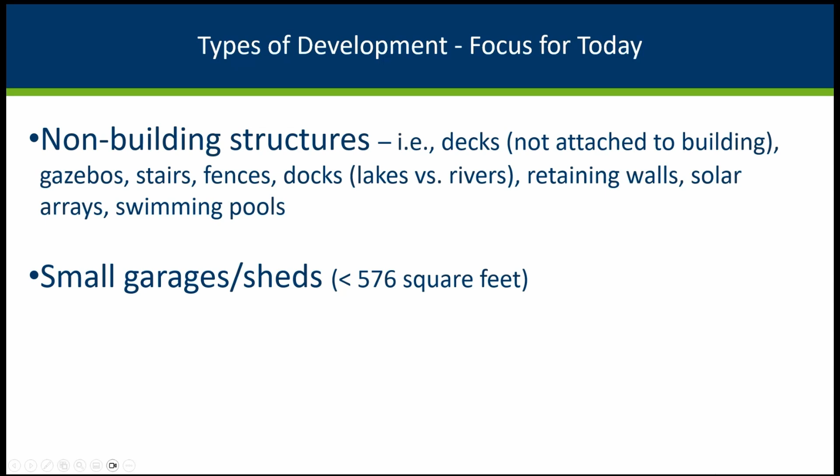The non-building structures category covers a lot of different things, including decks that are not part of a building, gazebos, stairs, fences, docks. We didn't have a separate slide about docks, so I'll mention that, especially on rivers, if you're having permanent docks, you've got to look at whether it's causing a rise in flood elevations—that's one of the concerns with floodways. Retaining walls, solar arrays, swimming pools—there are all kinds of things that get built that aren't actually buildings, but are structures in the floodplain that need to be considered and regulated.

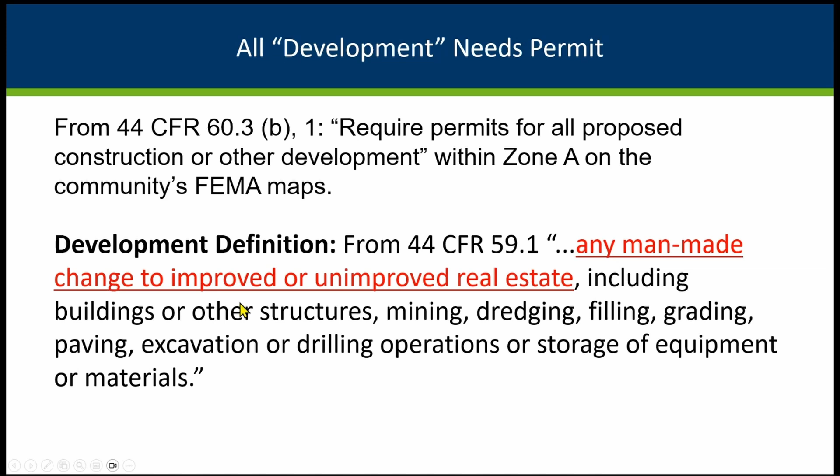Right off the bat, some of this will be repeat if you've heard our other basic presentations recently. One of the big things we always remind folks is 44 CFR 60.3b, from the Code of Federal Regulations. It states that all development needs a permit if it's within Zone A or AE, within the special flood hazard area on your community's floodplain maps. The definition of development is very broad—it certainly includes buildings, but also other types of structures, mining, dredging, filling, grading, storage of equipment or materials. It's any man-made change to improved or unimproved real estate.

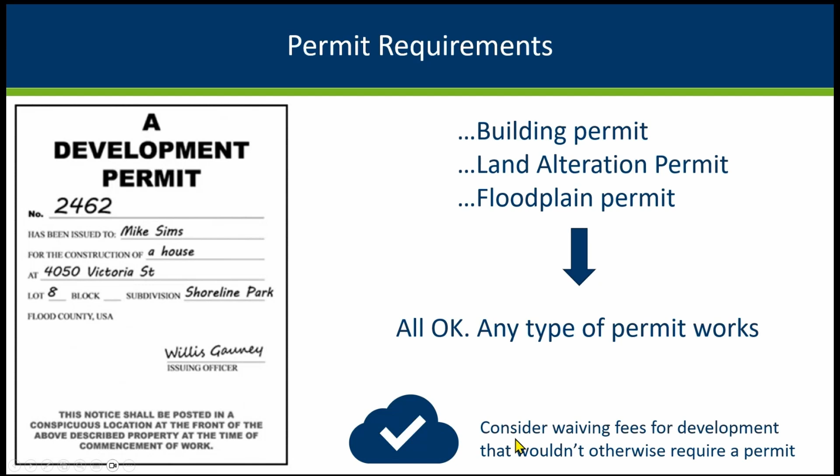That permit doesn't have to be a certain type. If you have building code and it's a building, you'll issue a building permit. But communities might call it a land alteration permit, a zoning permit, or a floodplain permit—any of those is fine. You just need some kind of permit process. And if it's something you wouldn't normally require a permit for, you can consider waiving fees or having reduced fees for those items.

I mentioned buildings, and we're specifically talking about smaller sheds today. Those of you with building code are used to saying, if it's a small shed under 200 square feet or whatever size the building code exempts, that exemption does not exist for floodplain regulations. Even small buildings that wouldn't require a building permit under the building code need a permit here, and a lot of other non-building structures we'll discuss also need a permit.

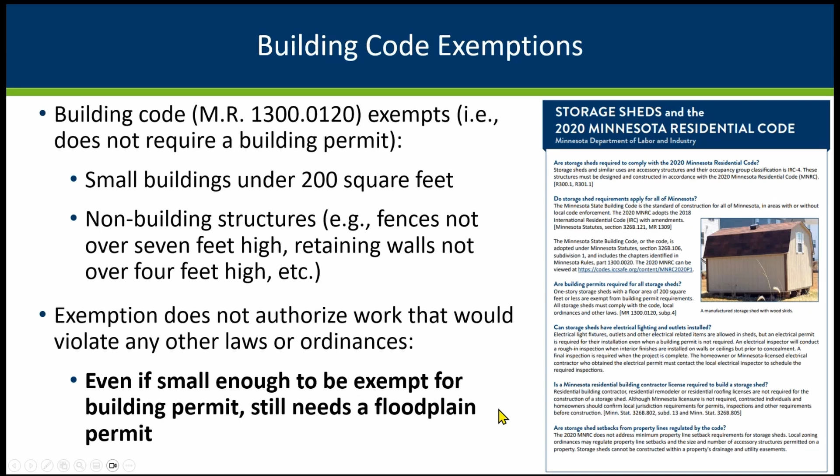So basically, it needs a permit if it's in the mapped floodplain. Part of our typical process is determining whether it's in the mapped floodplain and what district it's in, because that makes a big difference in terms of whether that building or structure is permittable and allowed in the floodplain, and what the requirements will be. So we'll be talking about zones.

I wanted to mention the different types of floodplain zones up front. The Zone A's are basically the 100-year flood zones. AE means it has an elevation on the official FEMA map—on older maps it had numbers instead of the E. Then there are a couple other categories: AO zones, which are more of an overland flow, and AH zones, which are more like ponded areas where the AH will have an elevation on the FEMA map, while AO will just have depths. We aren't going to get into details on these zones, but just be aware there are different A-type zones.

And then there's some A zones with nothing behind it, and that's where there might be some underlying supporting modeling or approximations of what the flood elevations are, but the base flood elevations are not on the FEMA map. We now will be having velocity zones or coastal zones in St. Louis as of March, in another couple months.

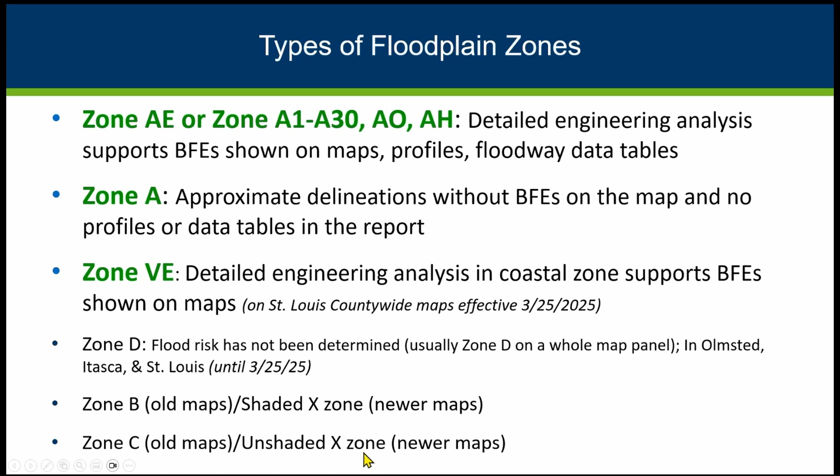Zone D is a place where the risk has not been determined, so it'll have a yellowish color on the FEMA maps, and we've just got a handful of counties where we have Zone D. Basically it's showing that the risk hasn't been determined, but there's no regulations for those areas. And the areas where we don't regulate, at least for the minimum standards, are shaded Zone X and unshaded Zone X, or Zone B and C on the older maps.

So the main zones that we're talking about are the floodway and flood fringe, which is how we break out the detailed study areas. And then we've got an area in your ordinance that we call the general floodplain, and that's going to be those approximate Zone A's and the detailed Zone A's where they haven't mapped the floodway, and we'll be talking about the floodway.

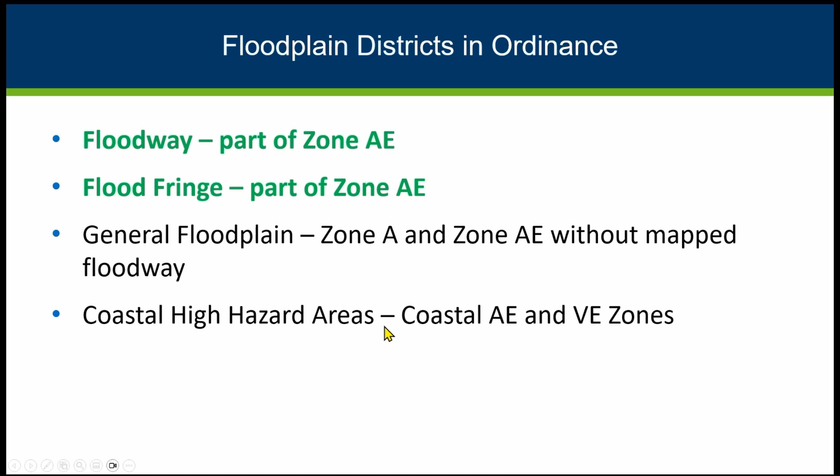We are not going to talk today about coastal high hazard areas. That's just in St. Louis County, so we'll just talk with the staffs there when those questions come up.

See if I can interrupt you real briefly. There was a question in the chat related to your previous slide, and they asked, when you say within the mapped floodplain, does that include Zone X in the shoreland zone?

Interesting question. Yeah, the floodplain regs don't. The shoreland goes beyond the floodplain in the shoreland zone, and there's some requirements that apply. The minimum elevations for buildings apply in the shoreland, but some of the other details we'll be talking about here are specifically floodplain regs. And if we want to get into examples toward the end, we could talk about what things might be different outside of the floodplain but within the shoreland district.

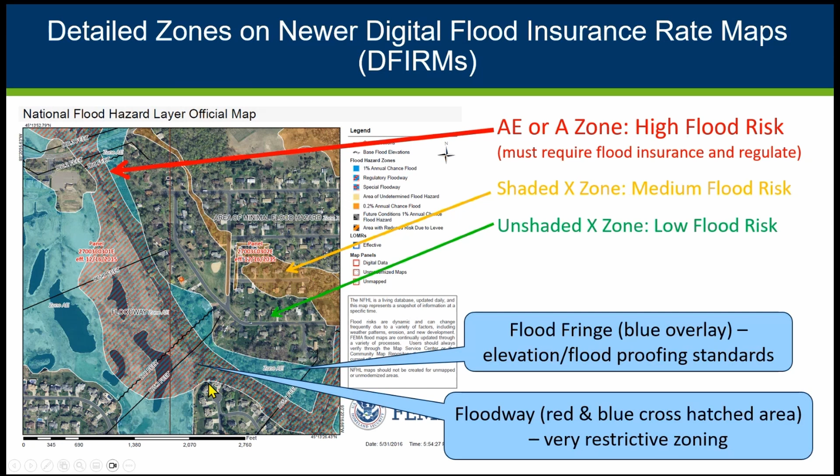On the newer maps, the coloring's a little different. The 100-year floodplain, the Zone A, is the light blue, with the floodway being this crosshatch, the hatched area with the red and blue. Again, the floodway is this area, and the flood fringe is that light blue area outside the floodway. The shaded Zone X is that medium risk area again, and the unshaded areas are the lower risk areas. So we're going to be again focusing on the floodway on both the old and new maps and the flood fringe.

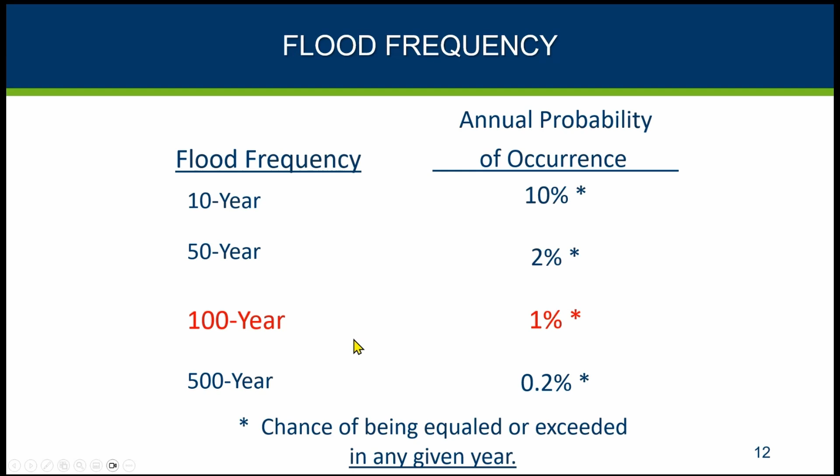And I've already used a couple of these terms, but the frequency that we use for regulatory purposes is the 100-year or the 1% annual chance flood. In the detailed areas they calculate other flood frequencies, but for the minimum requirements, we're talking about the 100-year or the 1% annual chance.

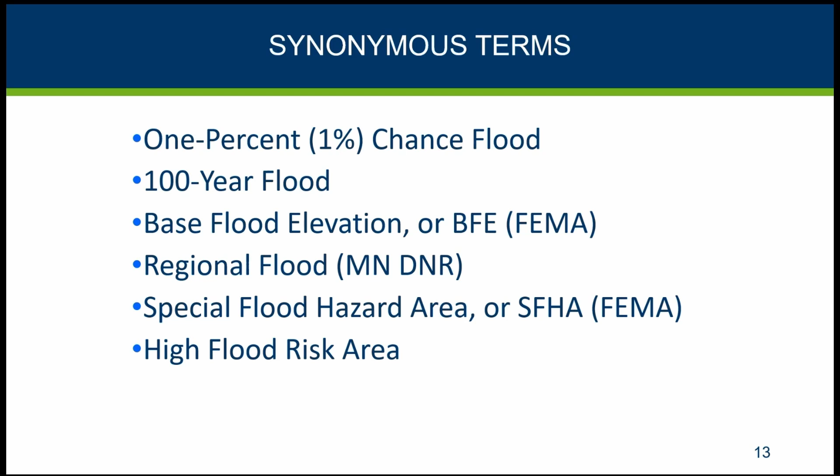And we do have different terms. I've already used a few of these: the 1% annual chance, the 100-year. Base flood elevation, or BFE, is a term FEMA uses a lot, and we'll talk about that with the mapping. Regional flood is what we call that in some of the Minnesota laws. Special flood hazard area is what we call the area when we're talking about lending requirements and insurance. And in general, we'll call it the high flood risk area.

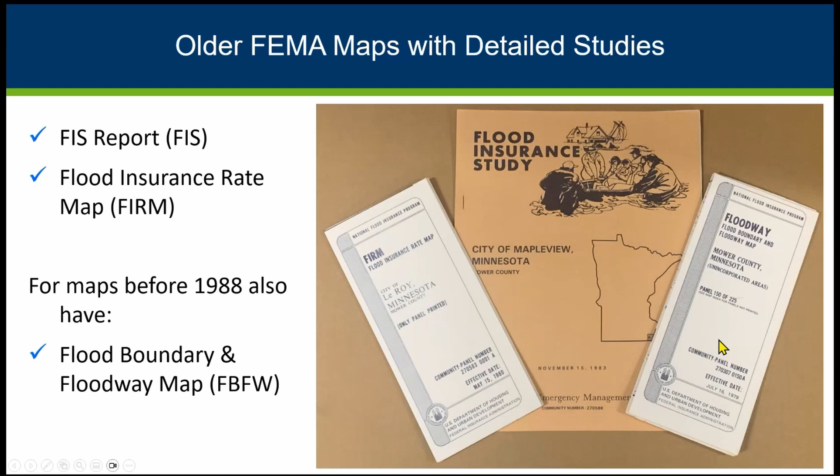So the first detailed maps that came out had a flood insurance study and they had a separate flood insurance rate map and floodway map. These generally came out before '88. And more recent maps are combined—they put everything onto one map.

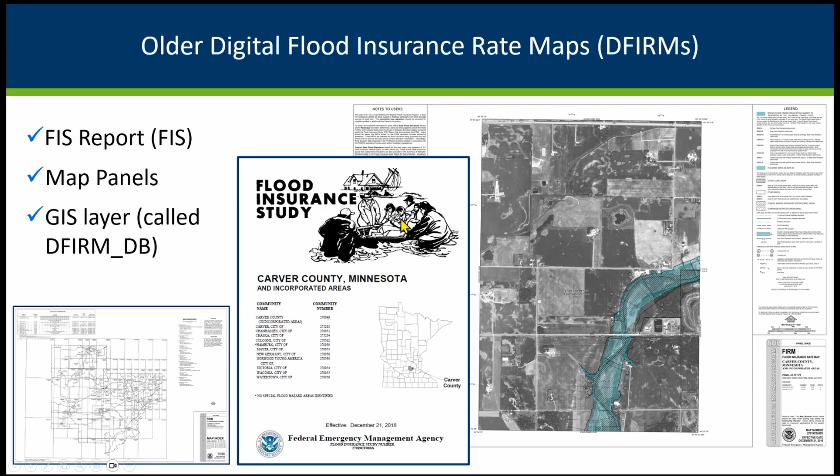Those older flood insurance studies tend to have this older look, with people being rescued looking like they're wearing 1950s clothes. But when the first digital maps came out, before the 2010s and the 2000s, we had some of the counties start the map update process, becoming digital.

Many of those counties, FEMA really just did a digital capture. You can see in this example on the paper map this weird shape for the floodplain, and that's exactly what they put into the digital version of those maps. So when you compare it to the 2-foot elevation contours, you'll see that some of those early digital maps' boundaries don't follow the contours very well.

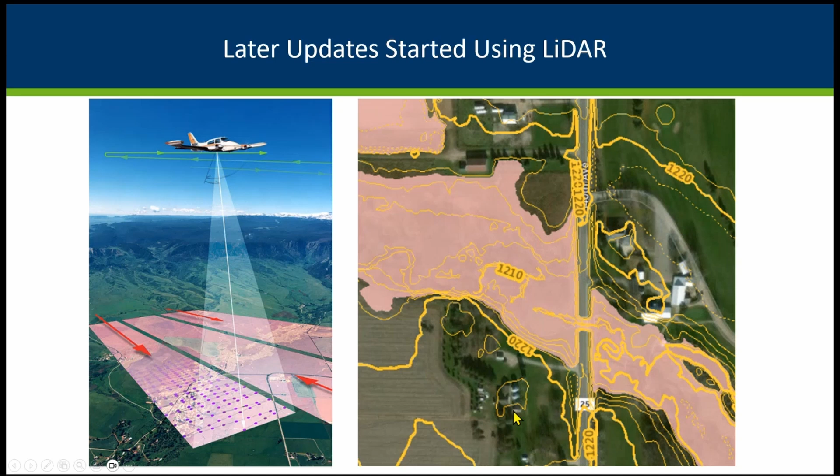But as time went on, and for those of you who got maps more recently, they used LiDAR, where planes fly over and shoot down light. They know the speed of light, so they can calculate really detailed ground elevations. The more recent maps' boundaries follow the elevation contours much better because they used that LiDAR to do the mapping and draw the boundaries.

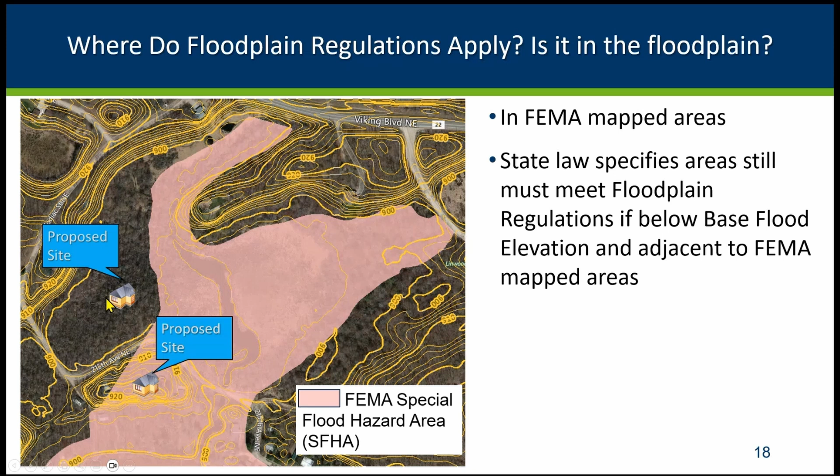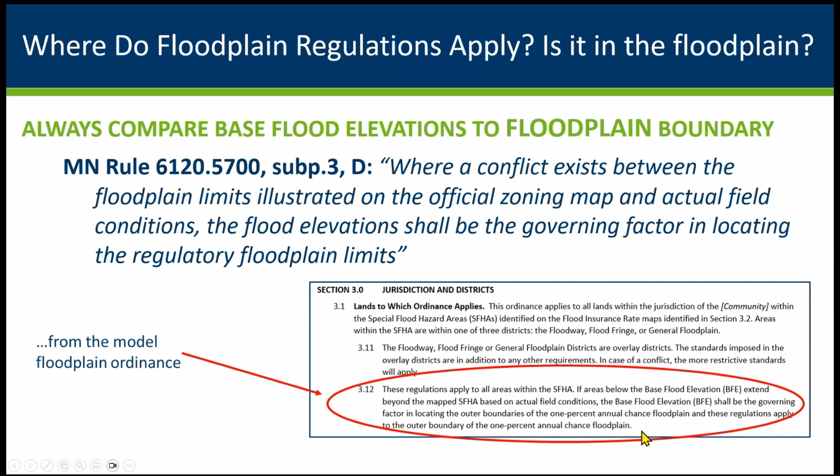A reminder that in Minnesota, state law requires your ordinance to regulate whatever's on the FEMA map — that's the FEMA minimum requirement. But state law also says that if you're in an area adjacent to that mapped area and below the base flood elevation, that is regulated by your ordinance too. So someone up high is still regulated because FEMA says you regulate whatever's on the maps, although they can get what's called a letter of map amendment, which we cover in other presentations. Someone who's low won't be told they need flood insurance right now — they will when the maps are updated and more accurately reflect the floodplain — but you're still regulating them because of our state law. We do have that wording in our model ordinance, basically saying that if they're in areas adjacent to the mapped floodplain and below the base flood elevation, you're regulating them.

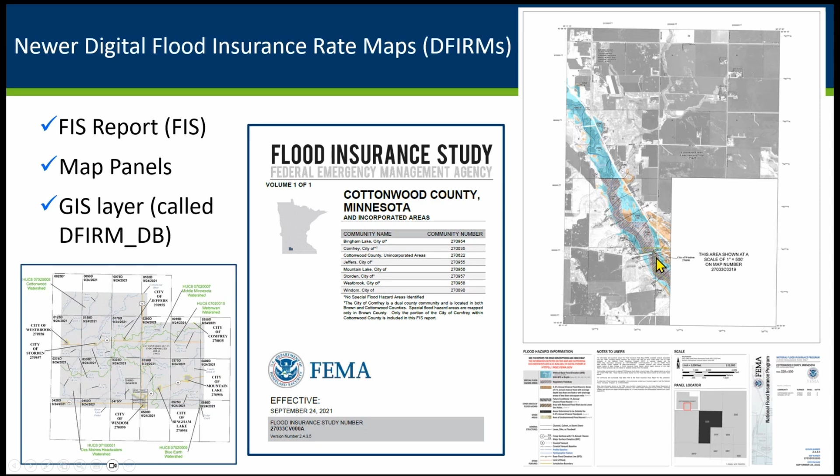A reminder that you need to look at the datum, the reference for the elevations on the maps. On our older maps, they used the 1929 datum — that's what most of our ordinary high water levels and lake level readings are in, because that's what was used for many years. More recently we're using the 88 datum, NAVD 88. The difference isn't a big deal in some areas — I saw Sean from La Crescent was on, and for you guys it's not a big deal — but up in the northwest part of the state, it can be up to a 1.4 foot difference, so that can be significant.

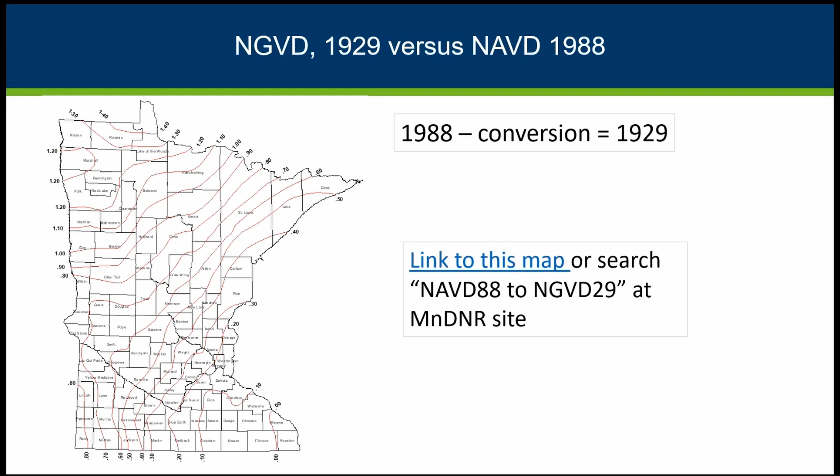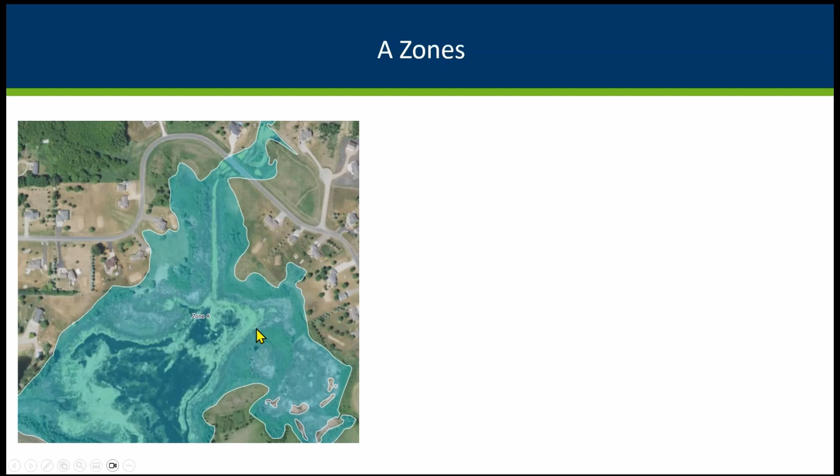The general floodplain is again the area that isn't mapped in detail. Here's an example of Zone A — no letter following the A, and in most cases no elevations shown, although I have seen in some recent mapping that they show underlying supporting elevations on some lakes. But in general, FEMA maps won't show elevations. We do have supporting modeling for more and more of our streams in the state, which is wonderful — in the last 5 to 10 years we've done a lot of great modeling and have supporting information, but you won't see that on the FEMA maps.

You will see that on the DNR's Lake and Flood Elevations online map — that's an example from our LFEO map. One important thing: if we don't have a floodway, your ordinance says you treat everything as floodway until there's been an analysis or you've determined otherwise — that's really the flood fringe. We have a separate training dealing with Zone A's where we cover techniques beyond having an engineer model where the floodway versus flood fringe is. But if you don't know, you consider it floodway.

We have a lot of unnumbered A zones, approximate A zones, throughout the state. The major rivers and major metro areas tend to have more detailed studies, but for many of you, you don't have detailed studies, so you don't know where the floodway is, and you have to consider those Zone A's to be floodway. This reiterates what I just said, and notes that we have the Zone A's training coming up.

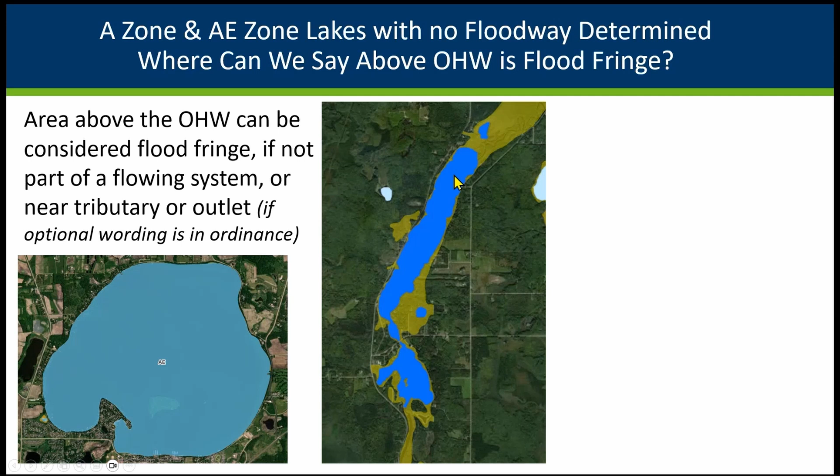Here's a good example of a lake, this looks like Lake Waconia, where for most of the lake you can say below the ordinary high is floodway, above the ordinary high is flood fringe. But here's a lake that is part of a flowing system, and that cannot be considered a lake for these purposes because it's part of a flowing system.

Or in this example, this is Medicine Lake, and for most of the lake you can use that ordinary high, above versus below, for floodway versus flood fringe. But by the inlets and outlets, those properties right there, you've got to look at whether it's influenced by the flows. That does help much of the development you're dealing with, so you've got an easier determination if that is flood fringe.

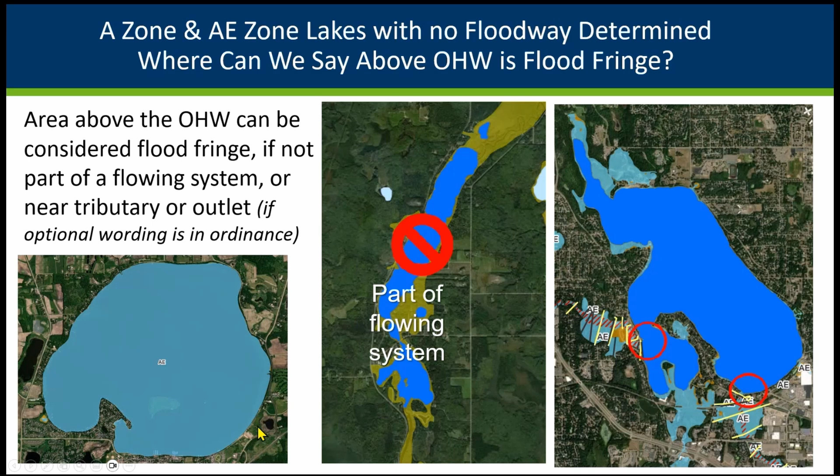The other reminder is sometimes we'll have detailed areas, zone AEs, but it won't show the floodway there. So that's got to be considered floodway unless you do some extra analysis to determine it's flood fringe, or you've got an engineer doing some modeling to determine where that floodway is.

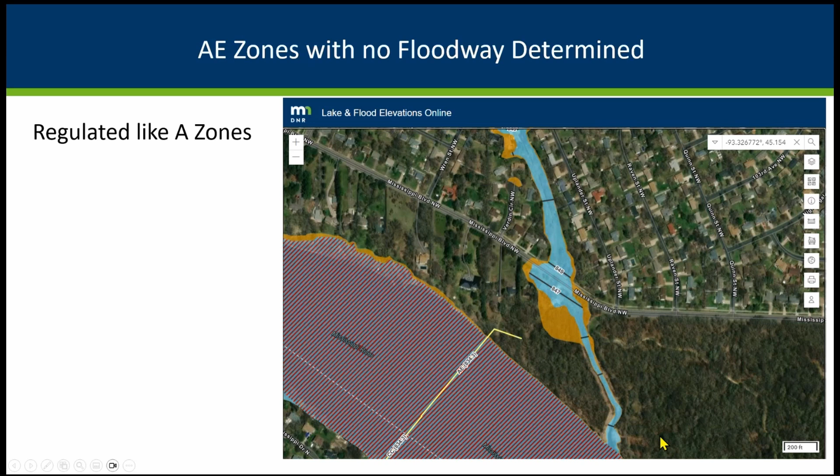And this is where I turn it over to Gary, and he'll talk about why floodway versus flood fringe makes a difference. Thank you, Ceil.

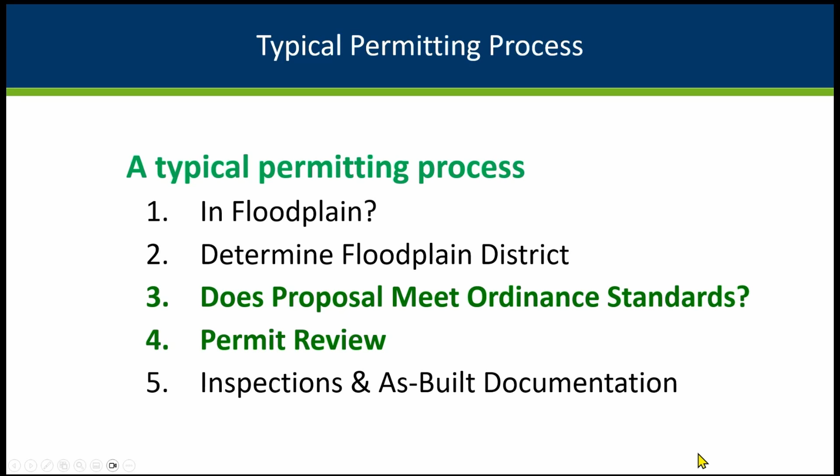Continuing our discussion on the typical permitting process for accessory structures, I'm going to talk a little bit about the permit application and just making sure that you've got adequate information to do a thorough review.

Just be aware that we do have a sample permit application available on the DNR's website. We actually have two versions: one's a simplified version for non-building type development, and the other is for development that does involve a building. You're not required to use the DNR's sample permit application, but you should develop a permit application.

In fact, your ordinance requires a permit application and includes some specifications and information to be required to allow you to make an adequate, informed permit decision. We recommend using ours because it covers all of the bases, containing enough information to make that determination.

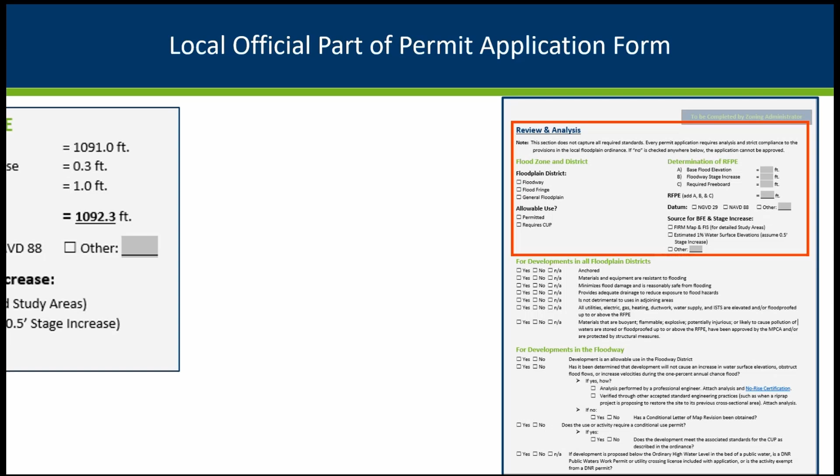Looking at a more detailed look at our application, at the very top part, this is where we talk about the different flood zones, as well as the determination of the RFPE.

Please remember that when calculating the regulatory flood protection elevation, or RFPE, it is based on the base flood elevation. The RFPE is calculated as BFE plus your stage increase, which in Minnesota can be up to half a foot, plus one foot of freeboard.

This is just a reminder that the regulatory flood protection elevation is required for all structures. And for buildings, it's the top of the lowest floor, that walking surface, that must be at or above the RFPE.

Your floodplain management ordinance includes a section that talks about development and the requirements that apply to all development within all floodplain districts. These come right out of the Code of Federal Regulations as well as from state rule. What we're showing here isn't a listing of all the actual requirements for all districts, but these are the highlights.

Development must be adequately anchored. It must be constructed using flood-resistant materials below the regulatory flood protection elevation. It must provide for adequate drainage such that it's not restricting flood carrying capacity, and not detrimental to adjoining areas.

Again, utilities must be elevated, or in some cases flood-proofed, up to the RFPE. Your ordinance does prohibit the storage of materials that are flammable or likely to cause pollution. And lastly, development must be protected from erosion or include sediment control measures.

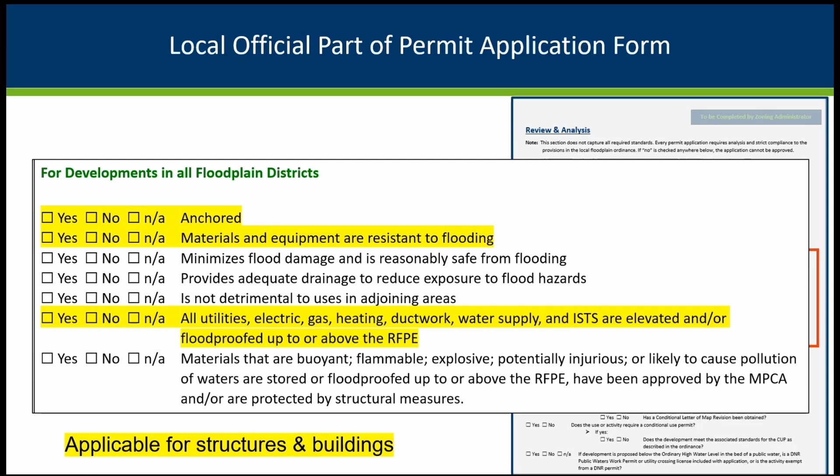What we highlighted here are those requirements more applicable to structures and buildings: being adequately anchored, using flood-resistant materials, ensuring that utilities are properly elevated above the RFPE, and things of that nature.

Just be aware that if your proposed development is actually within the floodway, your ordinance requires that, in addition to meeting the same standards as the flood fringe, the application you receive must include certification of no rise.

That certification of no rise is typically completed through a hydrologic and hydraulic analysis completed by a licensed engineer. We do have a Minnesota No-Rise certification form available for download on our website, and we recommend you use that.

Lastly, be aware that if that hydrologic and hydraulic analysis shows it's not meeting a no-rise, and is actually causing a rise, that development, before it can be constructed, must have an application and approval from FEMA for a conditional letter of map revision.

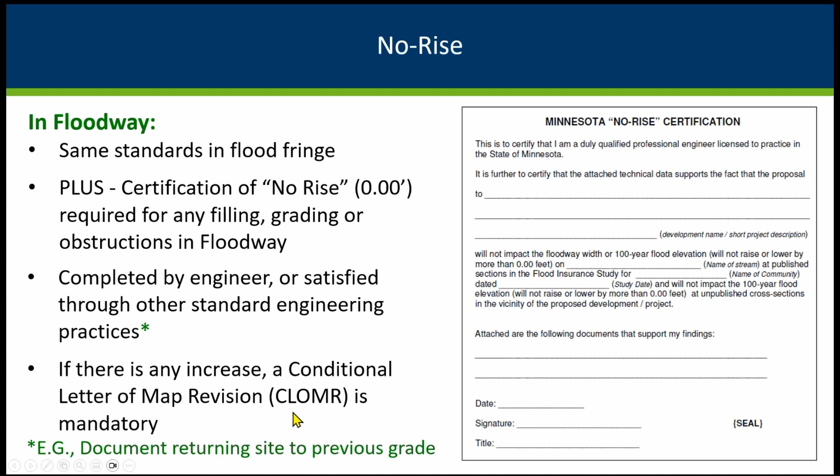Taking another look at our permit application, the bottom part talks about developments in the floodway. It's basically a check for yourself: is that proposal in the floodway? If it is, has the applicant provided adequate information to show this is a no-rise, and was it developed by a licensed engineer, or through alternative practices?

In cases where alternative methods are used to determine no-rise, we definitely recommend that you vet those through the Department of Natural Resources to make sure the methodology used is adequate.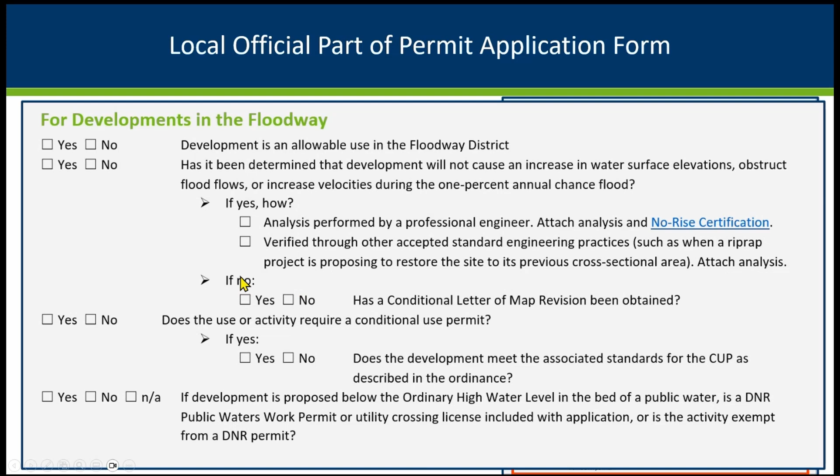Just be aware that your ordinance says you are to treat those areas as floodway until that flood fringe delineation has been completed. So new buildings and structures where that floodway has not been delineated may not be permitted unless the applicant provides certification from an engineer who has done the delineation process.

In areas with a floodway, the allowable rise is 0.00 feet, but as noted on the slide, if it's in a Zone A, we do have an allowable rise of up to half a foot. I think oftentimes that would be for other types of development encroachment, such as the placement of fill and things of that nature. But good point, thank you.

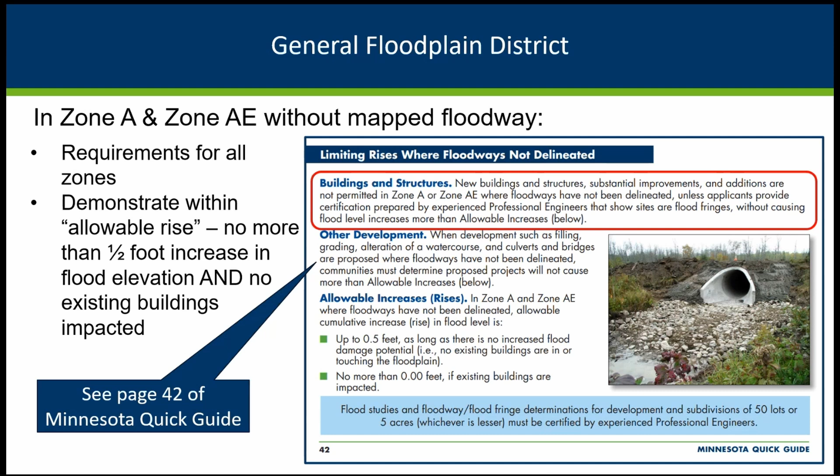Last but not least, taking a more detailed look at the application, we have a section on general floodplain district. Again it's just a mental check making sure you've thoroughly looked at your application, specifically asking: has that delineation been done by an engineer to determine if this is flood fringe or floodway?

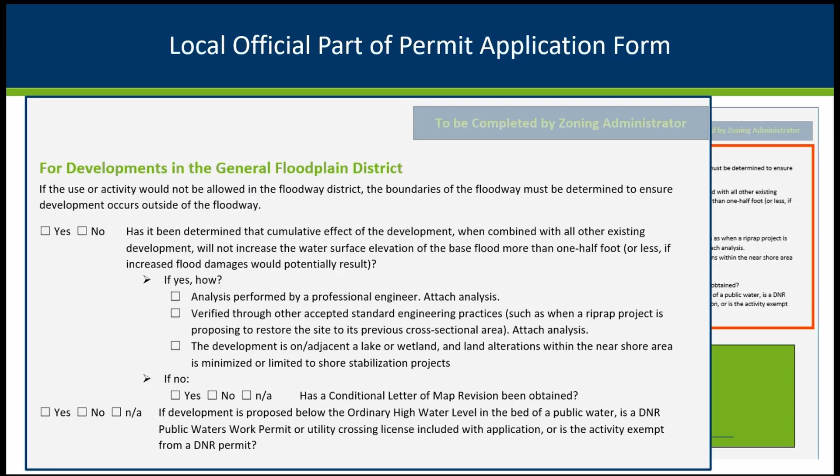Shifting gears a little bit, I wanted to talk about FEMA's policy and guidance on accessory structures. Be aware that they have this guidance, Bulletin P-2140. This is something they worked on during COVID, and in July 2020 they got a lot of these policies and guidance documents done.

We're not going to dive into this a whole lot, but they define a building as having 2 or more rigid walls and a fully secured roof. The question often comes up: what is a rigid wall and a fully secured roof? The basic definition is that these walls and roofs are not intended to automatically break away under flood pressures. They're really intended to be more a permanent fixed wall and roof.

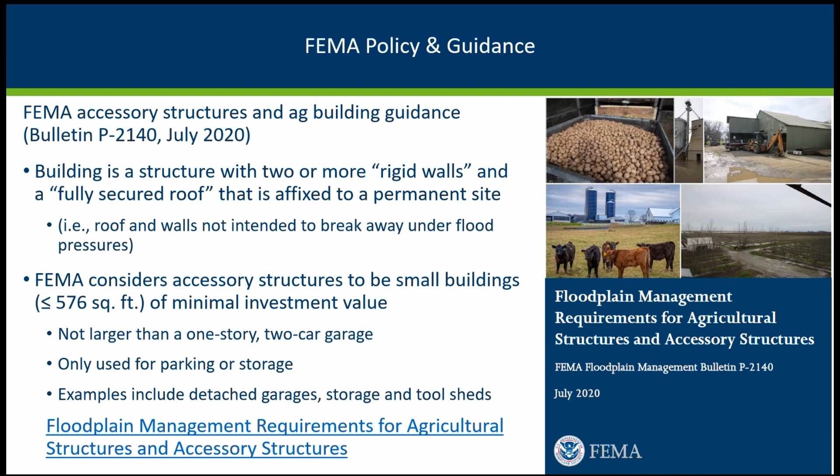Their guidance talks about accessory structures being small. FEMA says less than 600 square feet; your ordinance says less than 576 square feet. That's an agreement we've got with FEMA, so that they are of minimal investment, not larger than a 1-story two-car garage, only used for parking and storage. Examples include garages, storage sheds, and tool sheds.

FEMA's guidance also talks about structures you might think are accessory structures but are not. Those are structures where any part is used for human habitation, such as a portion used as an apartment, a place of employment, or entertainment. That includes workshops, rec rooms, game rooms, and of course gazebos, pergolas, and carports, since these are not walled and roofed, so FEMA doesn't consider them a building.

But please note that in your ordinance, in Minnesota DNR's state model ordinance, we do consider structures with fewer than 2 walls to be accessory structures, but we treat them differently so they remain compliant with FEMA.

Next, we're going to talk about permitted uses in the floodway and the flood fringe. We want to talk about the specific requirements for each.

So for garages and sheds in the flood fringe, they are a permitted use. However, they must be elevated on fill. If elevated on fill, that 15-foot extension is not required, as it would be for a residential building. Or they may be elevated using alternative methods, dry floodproofed or wet floodproofing are also options, again, only used for parking and limited storage.

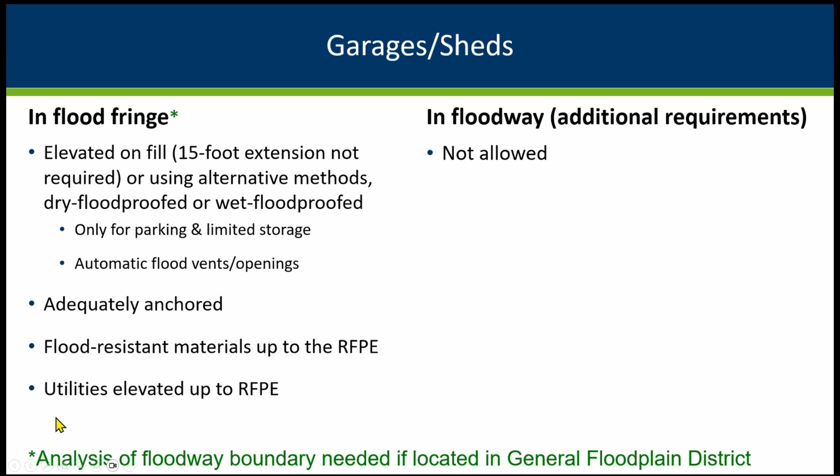Just a general note, we see the asterisk in green, just a reminder, because sometimes communities forget this. If it's a general floodplain district, that zone A or AE without a floodway must be treated as floodway until that floodway and flood fringe have been delineated by an engineer. So just an asterisk that you must make sure to do that step if it's a general floodplain district before you do your permitting.

Moving on to gazebos, binzebos, carports, picnic pavilions, and pergolas. And I know Ceil has some photographs later in our presentation today. Again, these are permitted uses in the flood fringe.

However, if these are designed with 2 or more rigid walls, we're going to treat these as though they are a garage and a shed. They're going to be considered a building, so they would have to meet those same requirements, but typically they have fewer than 2 rigid walls. So under those circumstances, these types of structures would not be required to be elevated. However, they still must be adequately anchored. Again, flood-resistant materials below the RFPE, as well as utilities elevated above the RFPE.

I do want to highlight that these are considered structures within the shoreline ordinance. So if your community does have a shoreland ordinance, be aware that they must meet setbacks and other shoreland requirements. They're not allowed in the bluff impact zone. However, they are allowed as water-oriented accessory structures to be as close as 10 feet from the OHW, provided they are not larger than 250 square feet in size.

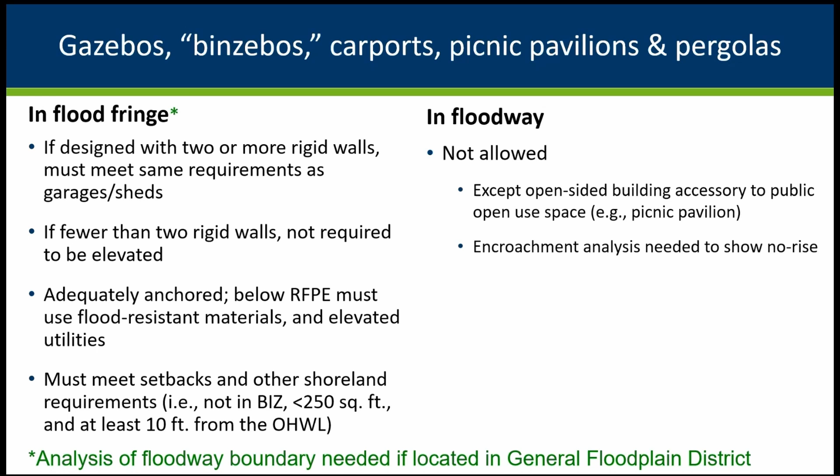These gazebos and other examples are not allowed in the floodway. The only exception would be those open-sided accessory buildings that are accessory to a public open use space. The most common example that Seal gives is that picnic pavilion. It's a roofed building, but it's completely open-sided. That could be allowed in the floodway. However, an encroachment analysis to show that it meets that no rise at less than 0.00 foot rise would be necessary before you could issue that permit.

Moving on to decks, another use that's allowed in the flood fringe. They must be adequately anchored. They must be constructed using flood-resistant materials. If they're attached to a building, such as a residential dwelling or a commercial property, again, they must meet those shoreland setbacks and other shoreland requirements.

Another note is that if they are attached, any structural support member below the BFE is something to take note of. If they're attached to that residential dwelling or commercial property and that structural support is below the base flood elevation, it will put the structure within the special flood hazard area for insurance purposes. So that's important to note.

Also, decks, if they are in the floodway and attached to a building, remember that if they're attached to a building, they are essentially part of the building. So if attached to a residential dwelling, of course, we don't allow those types of buildings in the floodway, so if attached, they are not allowed in the floodway. If detached, again, they must show that encroachment analysis to show no rise and must meet your shoreland setbacks and other shoreland requirements.

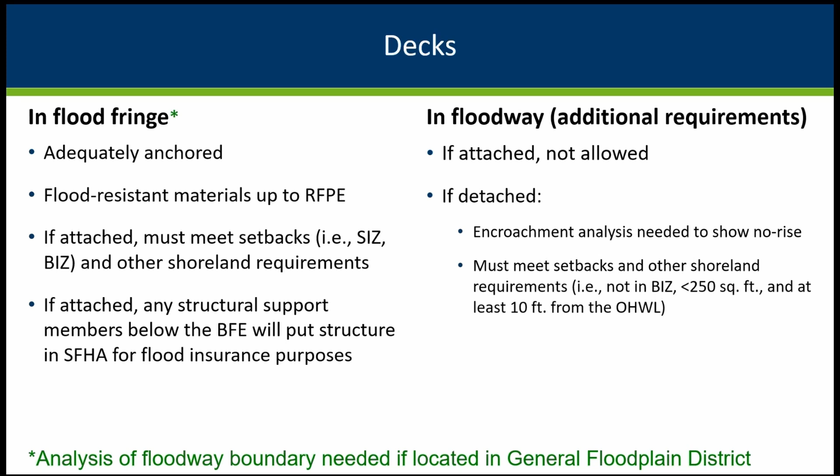Switching gears to fences, another common type of non-building development project. These fences are an allowable or permitted use in the flood fringe. Your ordinance may make reference to a farm fence. I know state rule talks about farm fences being exempt from a permit, from your floodplain management permit. However, you must have that optional exemption language in your ordinance.

Fences must not be detrimental to adjoining uses. They must provide adequate drainage and not restrict flood carrying capacity. They must be adequately anchored and constructed of flood resistant materials. Not detrimental to adjoining uses means they're not diverting flow or negatively impacting a neighbor.

Fences are allowed as a permitted use in the floodway, but you need an encroachment analysis to show that it meets a no-rise standard. Also, if an application is proposing a chain link fence in a no-rise analysis, they're treating it as an obstruction, even though water can flow through it.

Jessica was asking if there's a definition for narrow openings, either from DNR or examples from other folks. We'll talk specifically about chain link fences, those are not big enough openings. They catch debris, and chain link fences have to be treated as if they're a solid fence when doing the encroachment analysis.

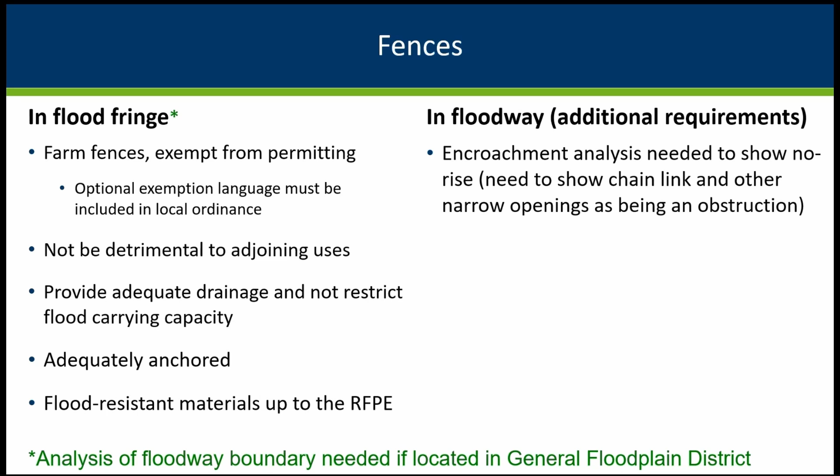Next category is solar panels, solar arrays, and solar farms, becoming much more commonplace. A lot of communities are receiving proposals and applications to install those. They are a permitted use if located in the flood fringe. The guidance is that solar panels, when fully tilted, that panel must be at or above the RFPE.

Control panels, often an electrical box or control panel, must also be elevated at or above the RFPE. All development in the floodplain must be adequately anchored to prevent flotation and becoming flood debris. They must also be constructed of flood-resistant materials.

FEMA has a technical bulletin, I believe Technical Bulletin 2, that provides additional information on flood-resistant materials. Roof-mounted solar panels are allowed on buildings located in the floodplain if the roof of that building and the connected utilities are at or above the regulatory flood protection elevation.

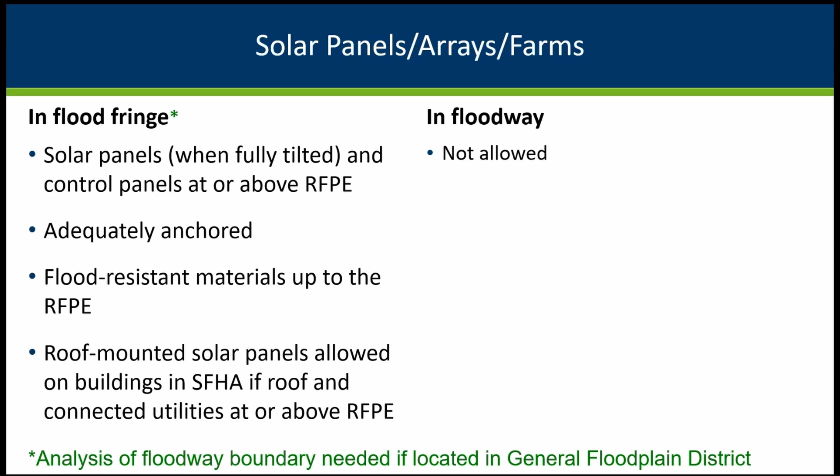Solar panels in the floodway are not allowed. I think this might be the last category, or we're getting close. Hoop buildings - Ceil has some photographs of these. These are hoop buildings typically covered in plastic for garden centers and things like that you might see in the springtime.

These are a permitted use in the flood fringe if they are temporary. If temporary, they're actually exempt from permitting. However, you really have to do due diligence to verify that they actually are temporary, which may sometimes be difficult. Otherwise, if they're not temporary, they must be treated as though they were a garage or a shed, and must meet all those requirements we talked about before. So it's kind of an odd situation, but hoop buildings can be difficult to permit.

In the floodway, for obvious reasons, hoop buildings are not allowed. Tanks - here I'm specifically talking about outside tanks, like liquid storage tanks, fuel tanks, things of that nature. In the flood fringe, they must be adequately anchored to prevent flotation and lateral movement. Fill openings, vents, cleanouts, and outlets must be elevated above the RFPE or designed to prevent entry of floodwater and loss of content. That's probably the most common, that they're just designed to be watertight and floodproof.

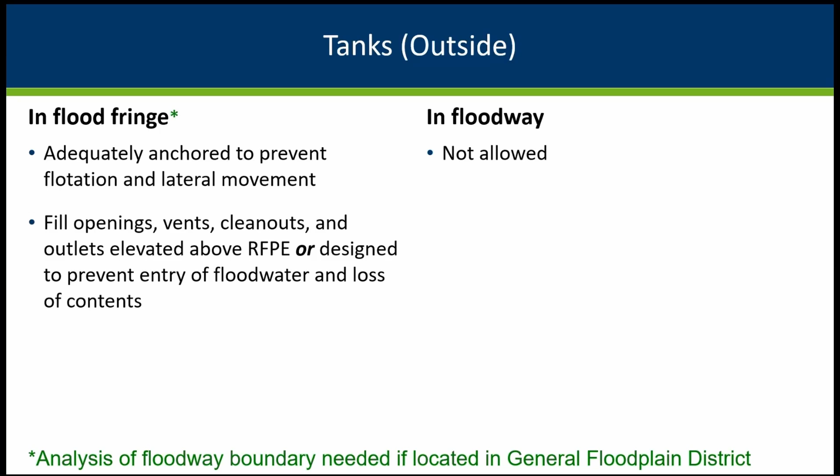Okay, so talking a little bit more with some pictures here, Gary focused on floodway versus flood fringe, which is a really important part of the decision. Here is an example of a garage, provided by Murray County, and this is one where they do have their flood vents or openings.

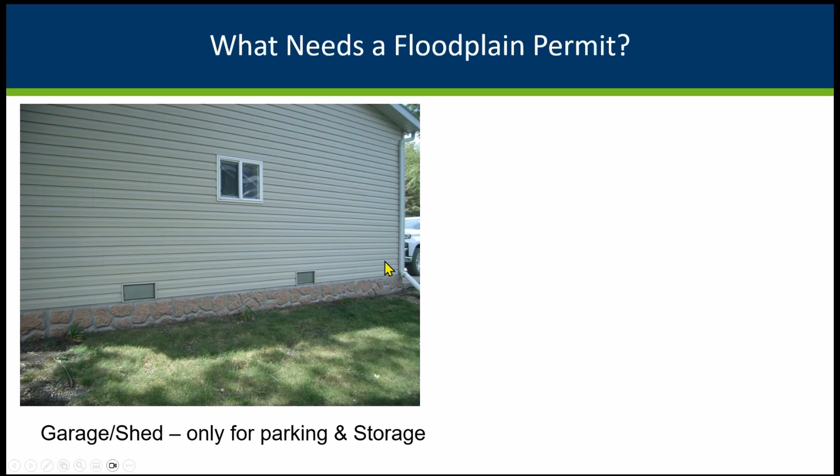It's 576 square feet or less, using the flood resistant materials. Here's a smaller shed - that's my neighbor's, not actually in the floodplain. But if it was in the floodplain, they would need the flood resistant materials, and this material isn't. It would need flood vents and to be well anchored. This one isn't anchored because it's not actually supposed to be there.

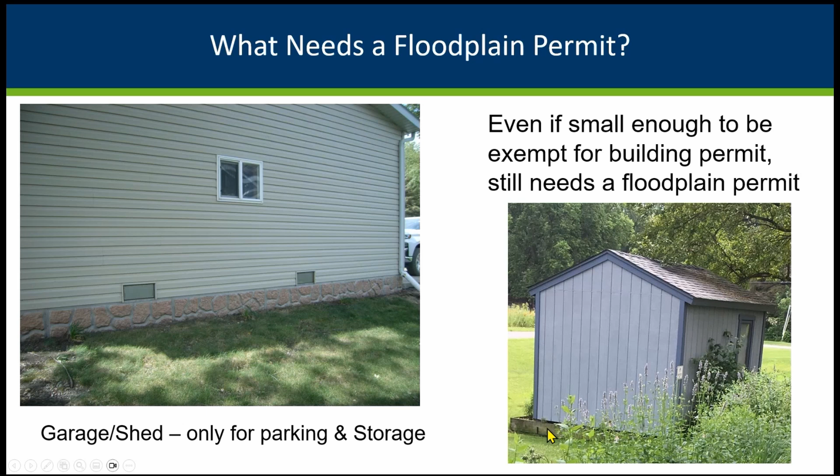But here's another graphic we like to use with those same concepts: if it's 576 square feet or less, which, as Gary mentioned, is the size FEMA negotiated with us. Our old ordinances, some of you may still have them, say 500 square feet, but we found out Illinois was allowed to use 576 square feet based on a 24 by 24 garage, and we asked to get the same thing. So our model ordinance has used 576 for quite a few years.

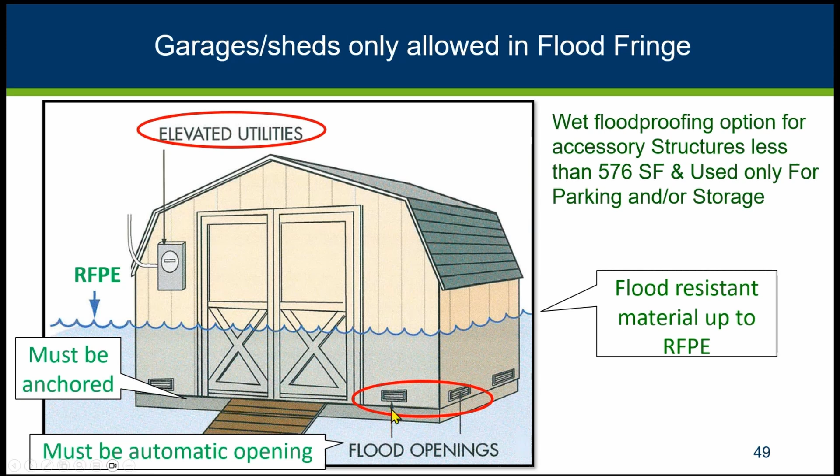Anyway, adequately anchored, they've got the flood openings, less than a foot above the ground or above the floor of the building. Any utilities - for these sheds it really should just be electric. If you're seeing plumbing and other things going in there, they're probably not just using it for parking and storage. Flood resistant materials, and the openings have got to be automatic - you can't be going and opening things up.

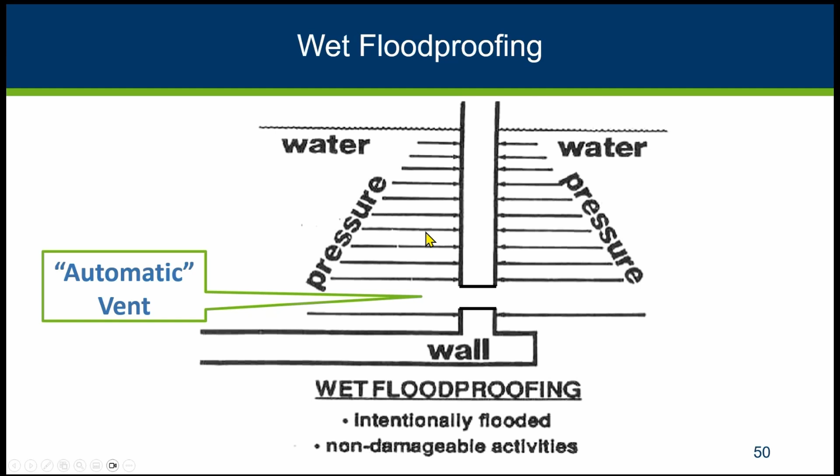And I saw a question pop up - salt storage structures. Yeah, that's a good example we should be adding. We would consider salt structures to be something that should not be below the RFPE, because salt is injurious to plants and animals during times of flooding. So that would be a good example to add.

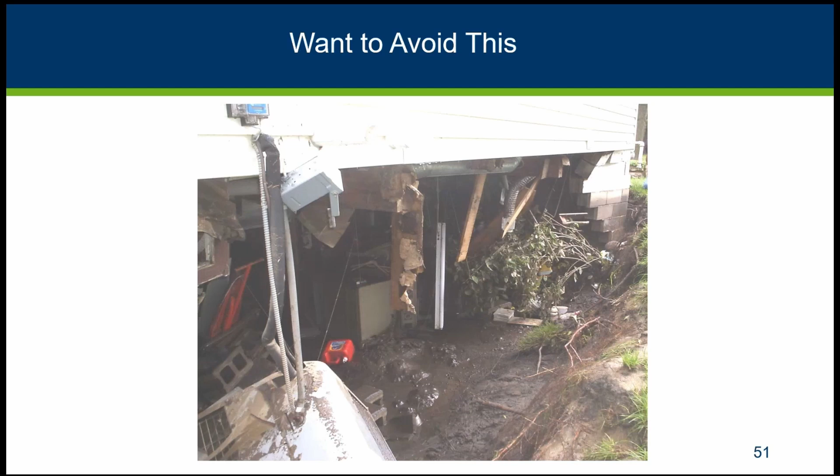So as I mentioned, there's criteria on the opening sizes - they shouldn't be too high up before you start getting that equalization of pressure, and they need to be on at least two sides of the building, so if one side gets blocked by debris, it can still equalize on the other side. There's specific criteria: you need a square inch of opening for every square foot enclosed. So if you've got a 576 square foot garage, you need 576 square inches of net opening, subtracting any bars and obstructions that are there.

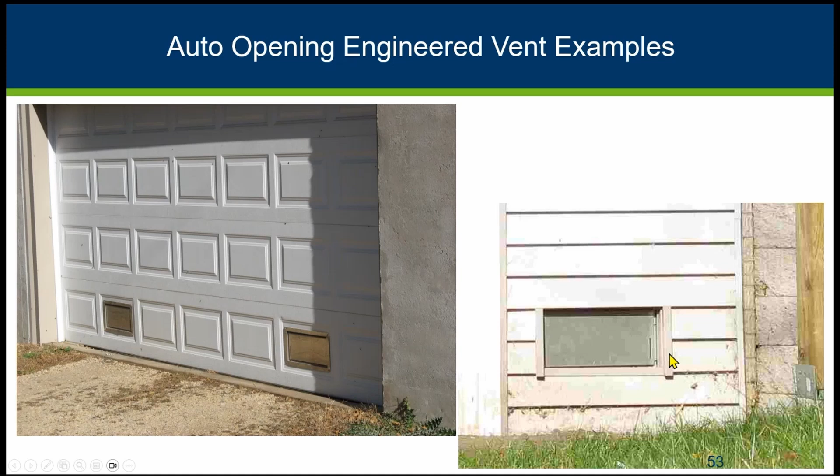A lot of times people do want to insulate those areas, so they get these engineered openings. The typical engineered openings are the equivalent of 200 square inches of opening. And there is a guide giving you information about the net opening in some of these other types of vents you might put in there.

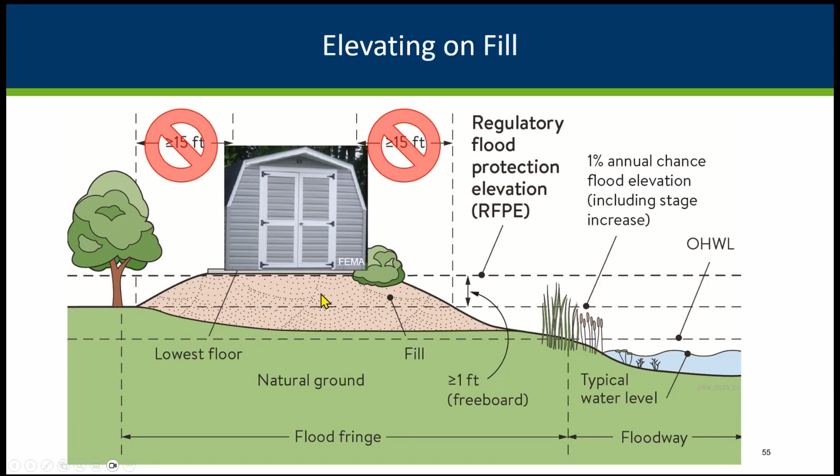Okay, we need a graphic that doesn't have the 15 foot of fill requirement for accessory structures - Gary added this since I last looked at the presentation, because we were doctoring up our normal building graphic. So if you're elevating on fill for these sheds, you don't have the 15 foot of fill requirement - that's only for residential buildings, although it may be in some of your ordinances, because we just got that update in the last few years to clarify it's only required for residential buildings, not for an accessory.

When you're doing the review and analysis, you're looking at figuring out what those elevations are, determining what your regulatory flood protection elevation is, and then verifying that they built it that way.

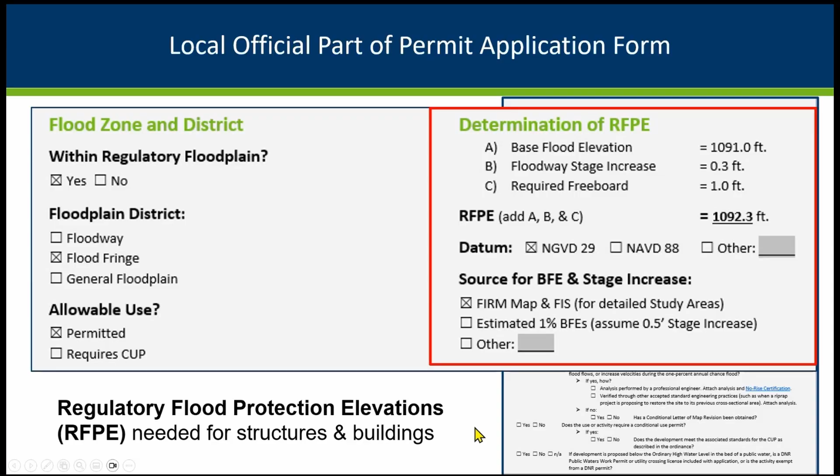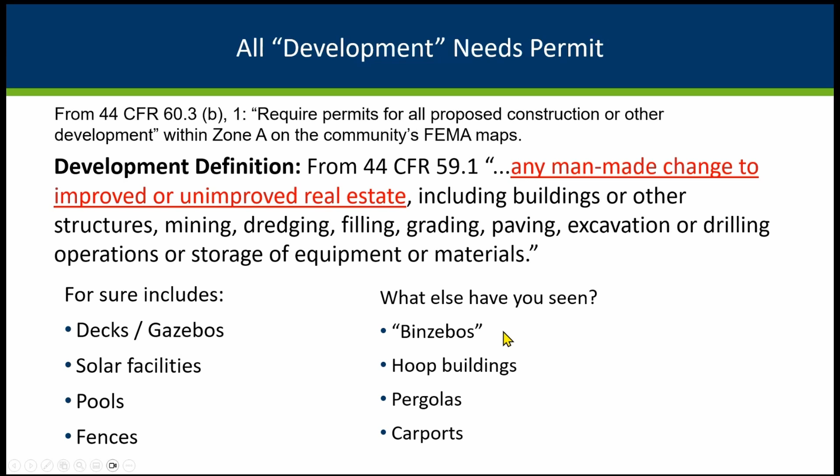Some of our other structures, we were giving some examples, and again all of these things need a permit, as we mentioned earlier. That does include decks, gazebos, solar facilities, and pools. And pools, in fact, since you're digging into the ground, they also need to meet the shoreline setbacks. Fences too. Some of the other things that have come up that people have seen. Binzebos I hadn't heard of until Stearns County provided some pictures of those a few years ago.

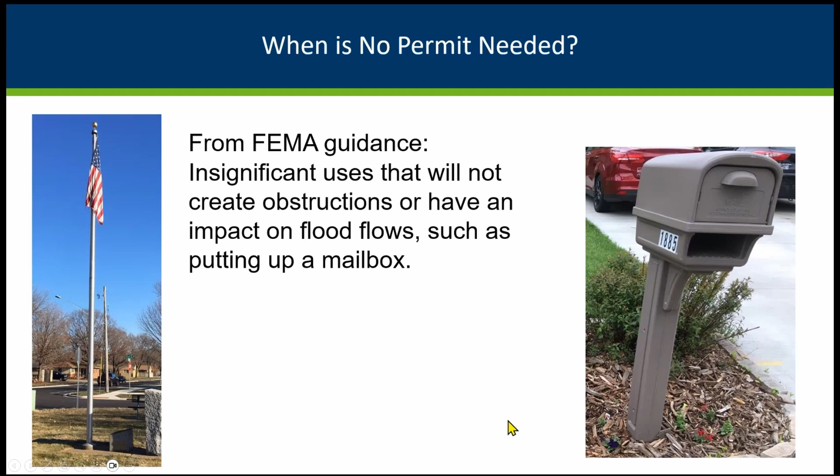There are a few things that FEMA does have guidance on, insignificant uses that will not create obstructions or have impact on flood flows, such as putting up a mailbox, coming straight out of FEMA guidance 480. A flagpole is another example we would give, basically the size of a flagpole or mailbox. So that wouldn't require a permit, but this is something that's actually in the floodway, and so they should be getting a permit for a non-building structure like this.

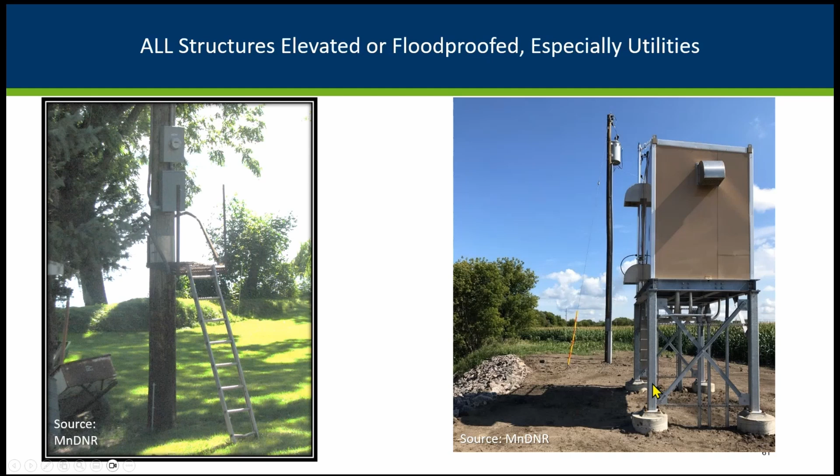Utilities, you definitely want to be elevating those so that they're not damaged by floodwaters. Here's a couple great examples. This is one I know Nicole Lehman took by the Mississippi River, and Lucas Youngsma took this picture out in western Minnesota someplace. You can see that they've got nice anchoring on both of these, and the parts that could be damaged have been nicely elevated.

So what's allowed in a floodway? Very limited situations where it is accessory to an open space. Again, the public park is our main example we'll give. It's got to be anchored, use flood resistant materials, and have your utilities that can be damaged by floodwaters elevated.

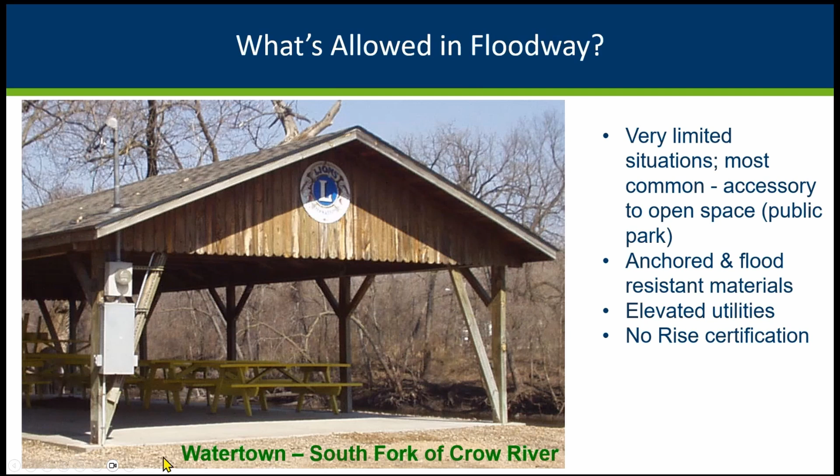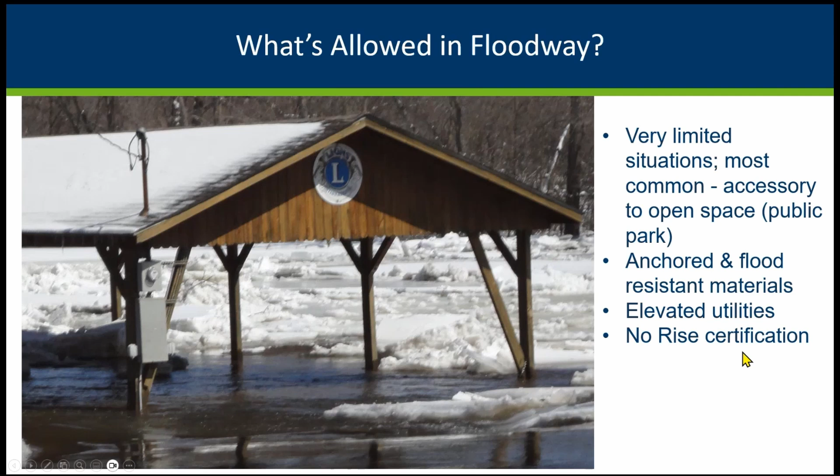This is the picture we've been using for a long time in our presentations, because we had this nice picture during a flood. This was like a 50-year flood at the time it happened. You can see it's nicely anchored. They would have removed the picnic tables before the flood came through. And you do have to do the no-rise certification if you're going to build that building.

Decks and gazebos do require a permit. They need to meet any local permit requirements you have, zoning requirements you have. They need to meet the setbacks and the size limits in your shoreland ordinance. So here's an example where that might be permittable.

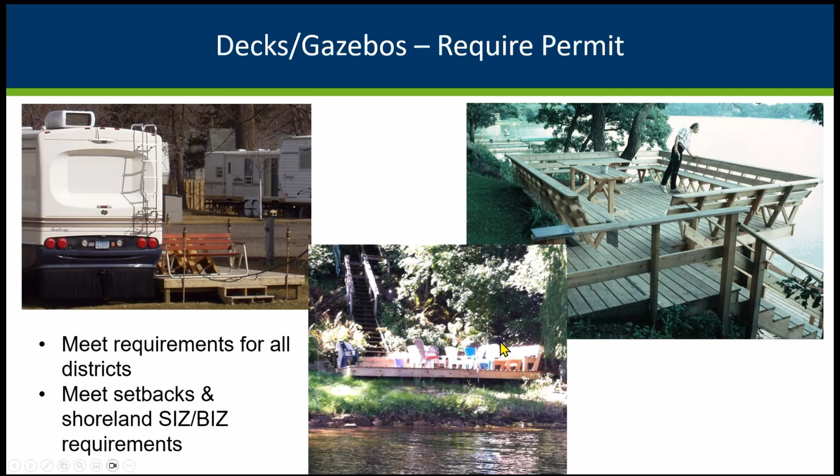Some of these are definitely... we had trouble finding good examples of decks because we had lots of examples of violations of decks that were not meeting the 10-foot setback or the maximum size to be a water-oriented accessory structure.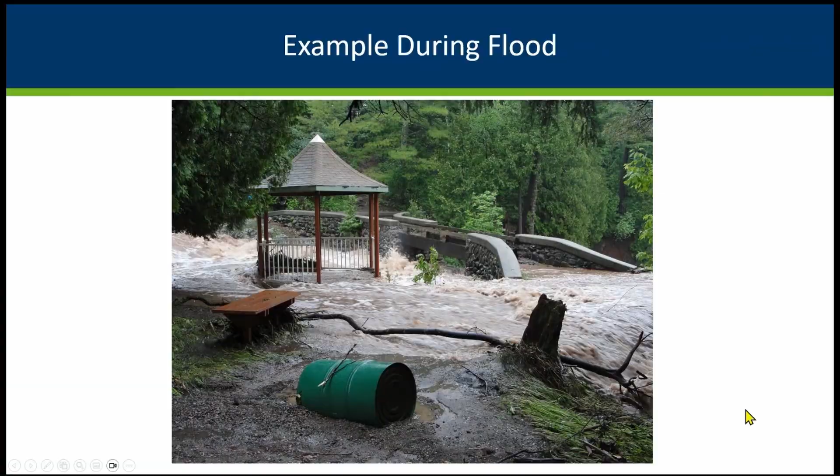Here's an example of a little gazebo during a flood. It looks like it is nicely anchored. I don't know where this barrel came from. And this is the gazebo example that Stearns County was providing to us. They are nicely anchored.

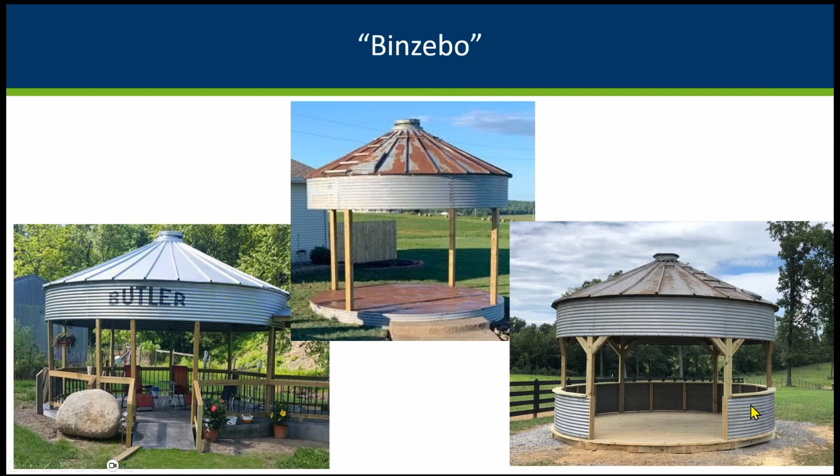This one, we're getting into the gray area of whether it's walled on two sides. I know that when a similar picture showed up in a presentation FEMA was giving on accessory structures, the main guy doing the presentation kind of stopped and said, oh yeah, I don't know about this one. That's got some partial walls. We need to talk about that in a little more detail.

Fences, that's one that FEMA made sure we added in our model ordinance in 2004, that fences need a permit. But when that got added, one of our more rural counties said, well wait a minute, farm fences, that seems kind of ridiculous that we've got to require a floodplain permit for farm fences. So we did negotiate with FEMA. We do have a statutory definition of farm fences in Minnesota law, and so in your model ordinance it does exempt your typical posts and barbed wire fences. That statutory definition does include some versions that are solid walls, and so the part we include in our exemption is just those more typical things you think of for farm fences.

But if it's a chain link fence or a privacy fence, that's definitely an obstruction and definitely needs to be permitted. And if it's in the floodway, you've got to do a no-rise analysis. As we were discussing a little earlier, for the no-rise on these little openings you've got in a chain link fence, you've got to essentially consider that to be total obstruction. We've been getting into discussions of how wide the openings need to be so that you can count them as openings.

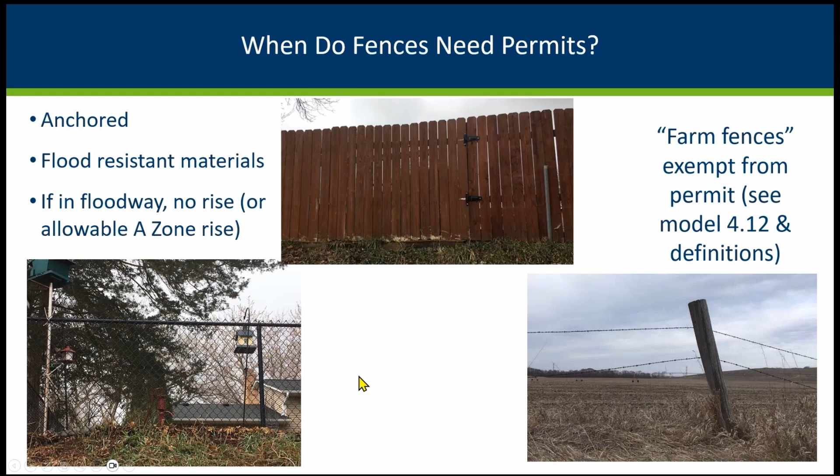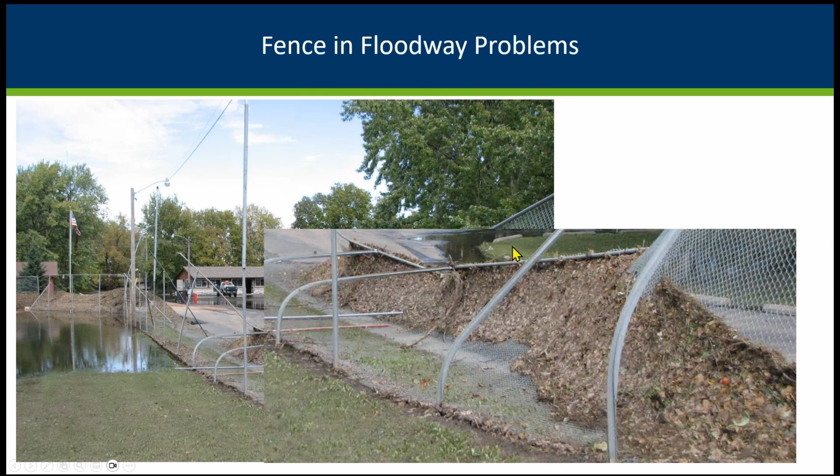That is something we're still evolving guidance on. But the reasoning is: here's a fence that's perpendicular to the flow. During the flood, the fence actually caught all this debris. The flow is going this way. If you zoom in, you can see better that's all the debris that got caught in the fence, strong enough that it bent over. So it can divert water, and that is a concern.

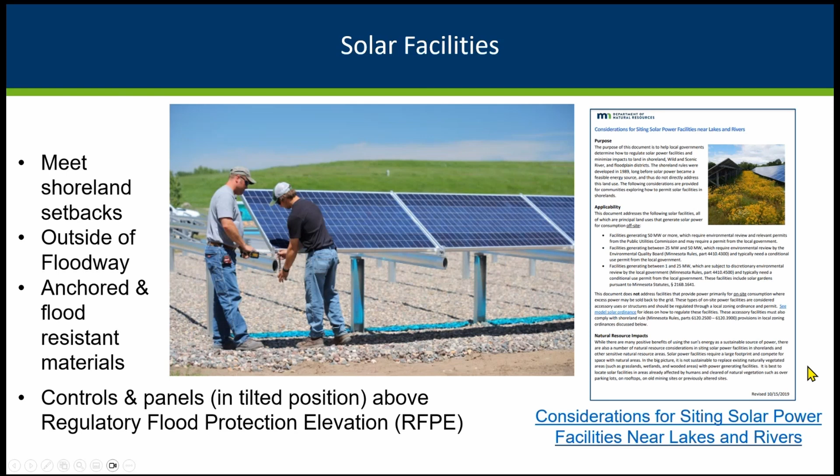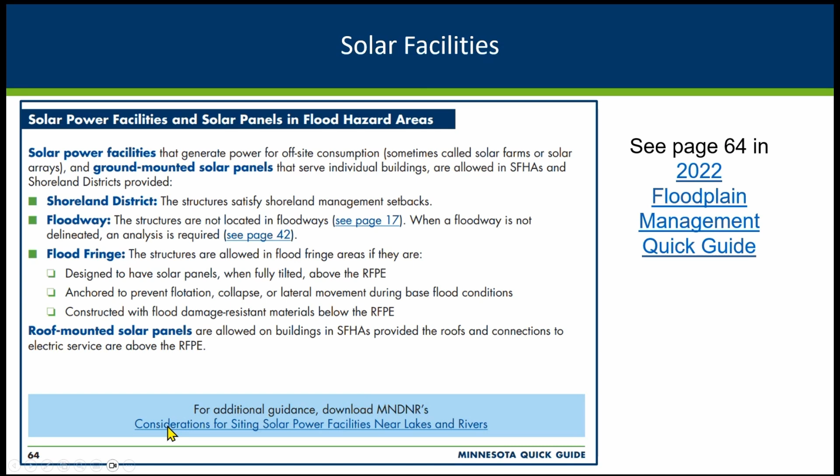We have a separate document that gets a lot more into the shoreland regulations, but briefly mentions some floodplain regulations toward the end. We also have solar facilities mentioned in our quick guide on page 64, covering some of these key situations you need to be looking at. We also have a link to that same longer document that includes the shoreland guidance.

The FEMA structure definition, specifically in addition to walled and roofed buildings, talks about gas and liquid storage tanks. They need a permit, and if they're elevated, that's preferable so they're above the RFPE. If they're lower, they've got to be nicely anchored because these can be buoyant, and if you don't have them well anchored, they're going to pop up.

Along the same lines, you sometimes run into similar situations with cemeteries and caskets - if they're not buried and anchored well, they will pop up. Or if you've got erosion problems, we've had places around the state where some of the old cemeteries have become an issue. And in Katrina, they had a lot of problems with their cemeteries.

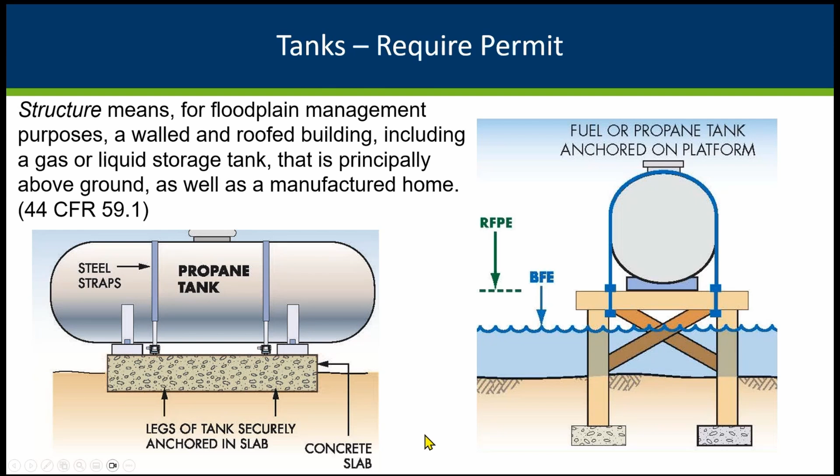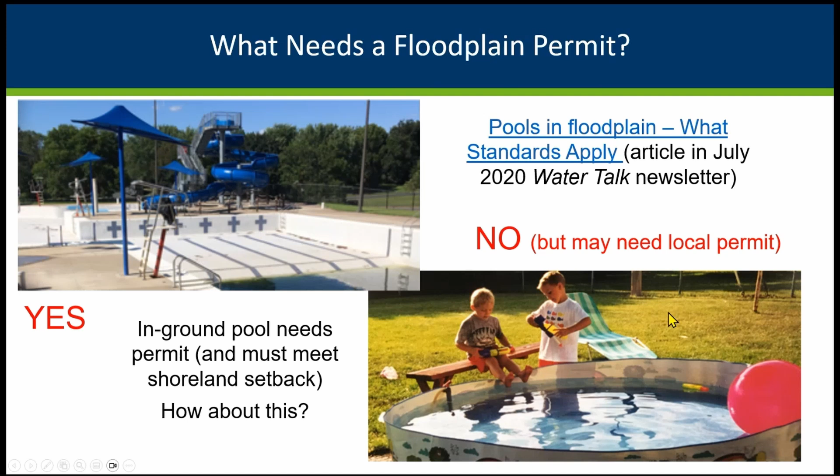This is something temporary that we consider to not need a permit, but I understand some local authorities will require some kind of permit if there's a certain depth of water here. We do have a page in the quick guide talking about pools also, and some other things to think about - ancillary things like fencing, pool houses, that kind of stuff you need to be thinking about.

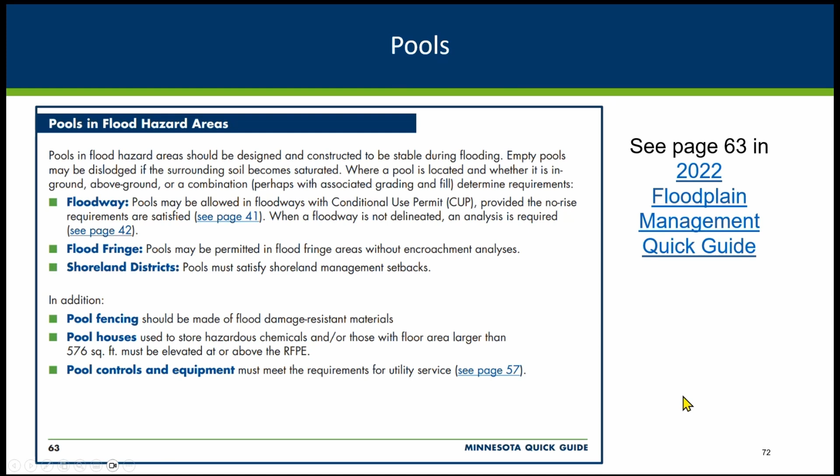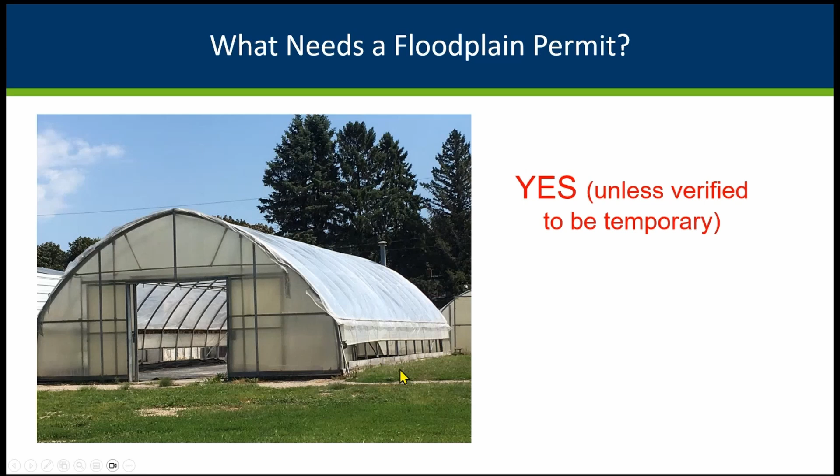Here's our hoop house. If I remember correctly, Jean, I took this near your office there in Slayton, but that does need a permit. You can see there's some more permanent stuff going on here. So unless they can show it's temporary, it is going to be treated as if it's a shed or a building, and needs to be anchored and flood resistant and meet all those requirements.

Inspections, as-built documentation is important. If it is one of those sheds, it's a building, we recommend using the FEMA elevation certificate. We do have the DNR elevation certificate, as-built certificate, that's got a few of our things that are unique, like low access point and the 15 feet of fill for the residential buildings, those kinds of things.

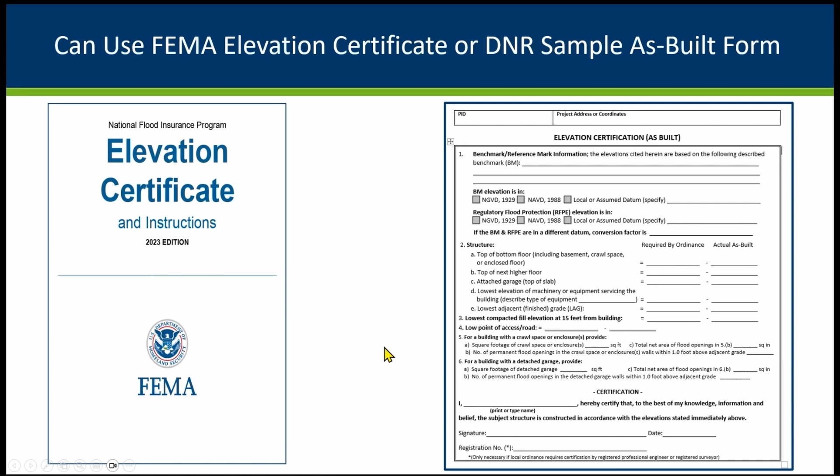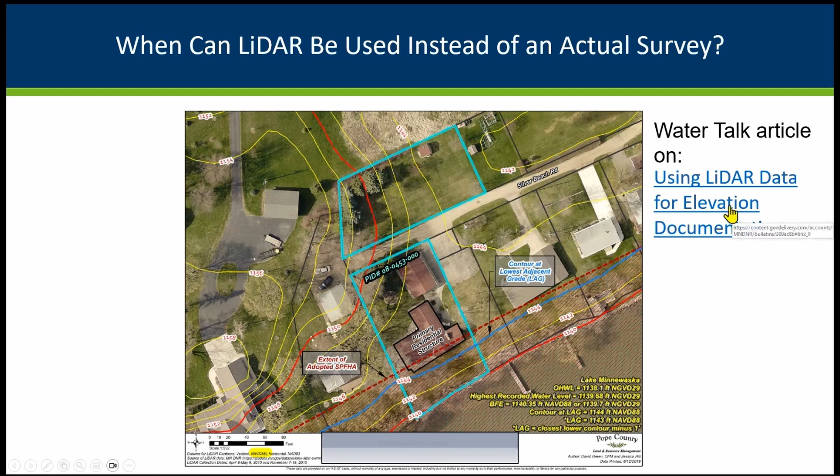If it is a building that's higher and clearly meeting requirements, like a shed - if it was a primary residence, I'd be less likely to go this direction. But if it is a building that's clearly high based on LiDAR, sometimes you can just use the LiDAR and photos of what they built and not require a licensed surveyor to come do a survey. I did do an article about this in one of the water talks, and this has a link to that article.

It is. So I think we've been answering the questions as we've been going. Gary, did you see any that I missed? No additional questions in the chat. Okay.